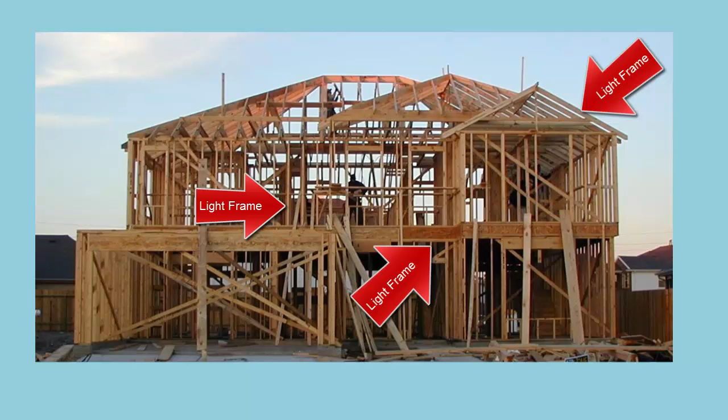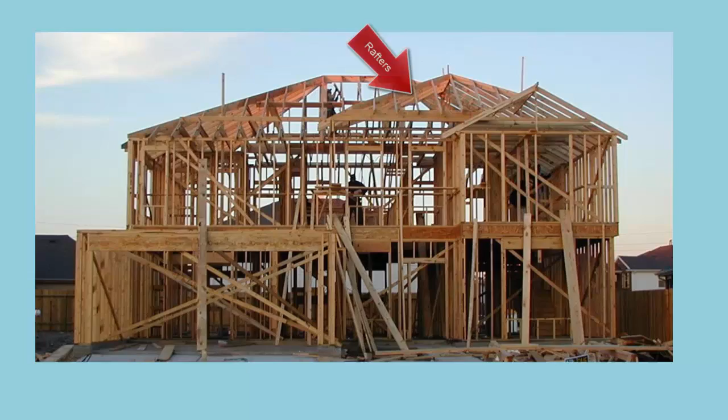Today, we'll look at light frame construction, which is typical for building houses in the United States, and the loads it must withstand. Light frame construction consists of repetitive members, like wood rafters or trusses for the roof structure, wood studs for walls, and wood joists for floors.

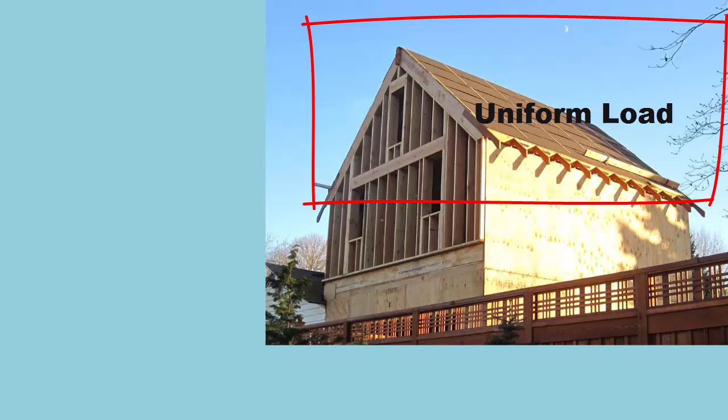We use a shorthand to describe the combined loads as a certain weight per square foot, called a uniform load. The calculation is load in pounds divided by 1 square foot equals uniform load in pounds per square foot.

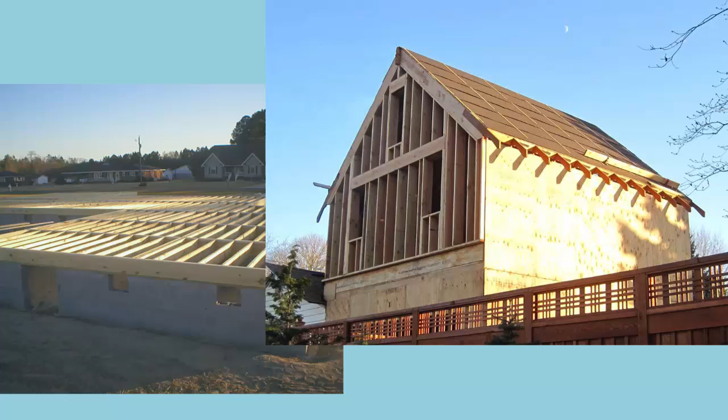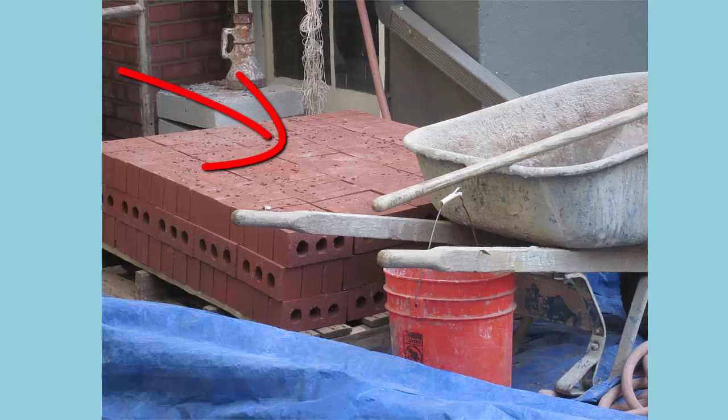Both roofs and floors carry live loads and dead loads. Live loads are temporary, like snow, furniture, and people. Dead loads are permanent, like the weight of building materials. Uniform loads are a combination of live loads and dead loads.

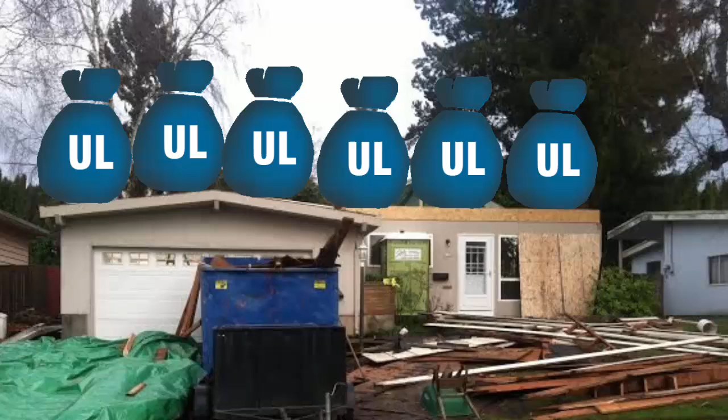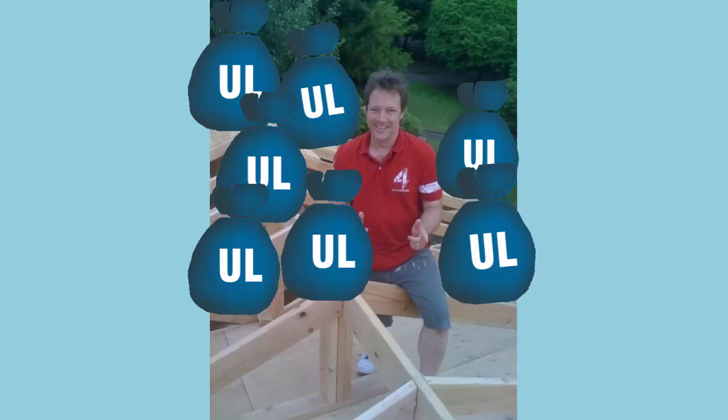Think of uniform load as a weight, like a sandbag sitting on each square foot of roof. It's called a uniform load because the repetitive members and the load they carry are evenly distributed across the roof. Loads start at the roof.

Structural repetitive members at the roof, rafters or trusses, transfer vertical loads to beams or walls. Additional loads occur at the floors, and the repetitive structural members, floor joists, transfer the loads to beams, walls, or columns. All of these loads are eventually transferred to the foundation system.

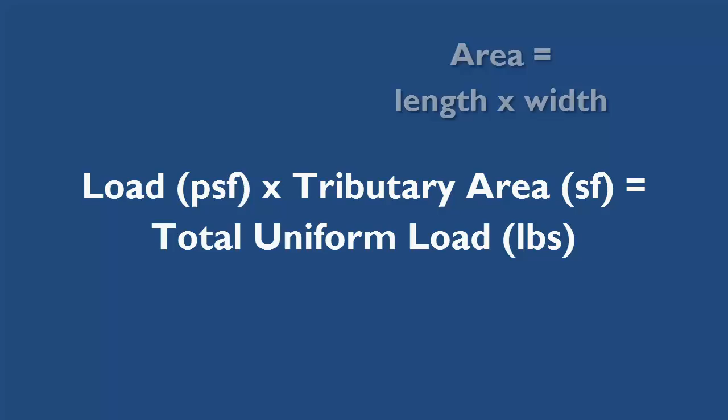Tributary area. The equation we use to calculate total loads for horizontal surfaces, like roofs and floors, is the uniform load in pounds per square foot times the tributary area in square feet, which equals total uniform load in pounds. For the area, we need both a width and a length.

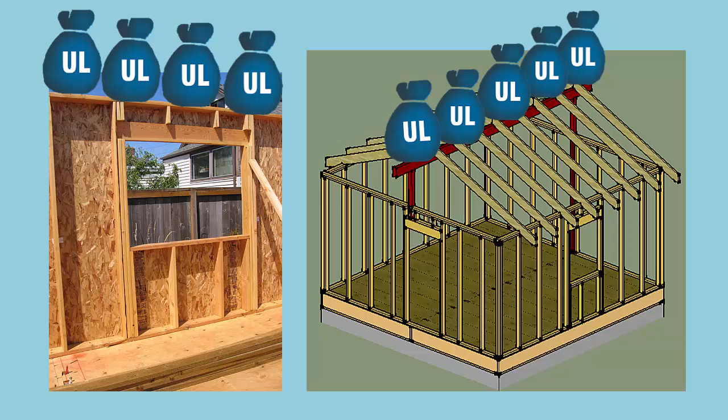However, these uniform loads can also be expressed as pounds per linear foot, which is how we measure loads on walls and beams. To get this number, we need to identify the tributary width. When we multiply units in pounds per square feet by units in feet, we simplify by deleting the feet from the equation, and the resulting units are in pounds per foot.

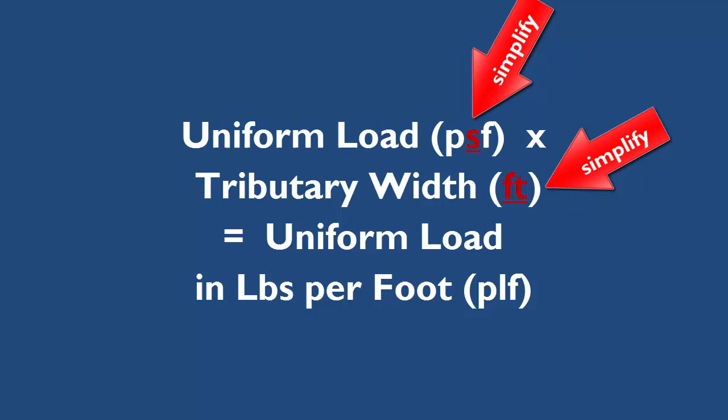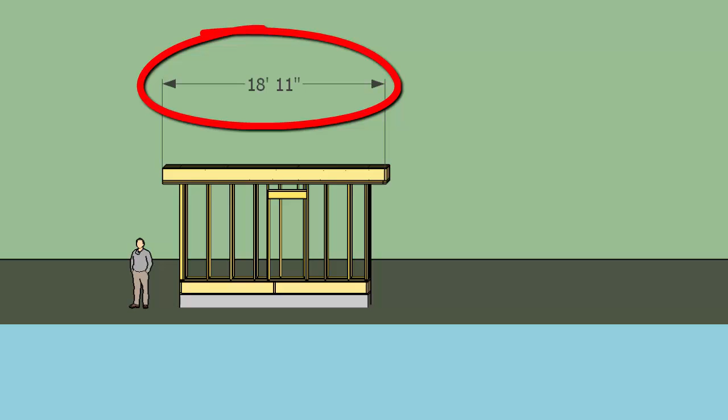Measuring tributary width. Tributary width is the horizontal measure between support points. This means that the width measured is the same whether it's flat like a floor or sloped like a roof, and the slope can be a little or a lot. The tributary width remains the same.

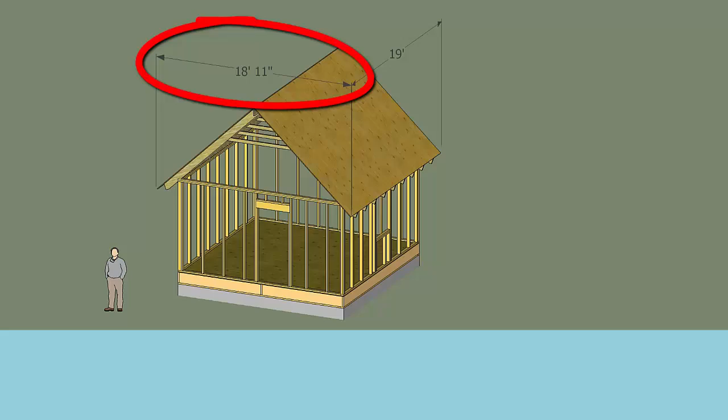To determine tributary width for roofs, we first need to consider the type of roof structure and how it transfers its loads. The three types of roof structure are trusses, rafters with ridge board, rafters with ridge beam.

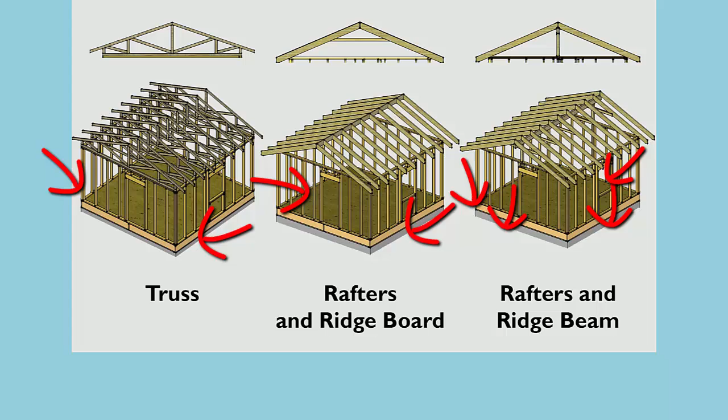Both trusses and rafters with ridge board transfer roof loads in the same way, so we'll look at them together. It's important to remember that the ridge board is non-structural and merely provides lateral stabilization to the rafters at their peak. To calculate tributary width for trusses and rafters, which transfer loads to exterior walls, we measure horizontally from the ridge to the edge of the roof.

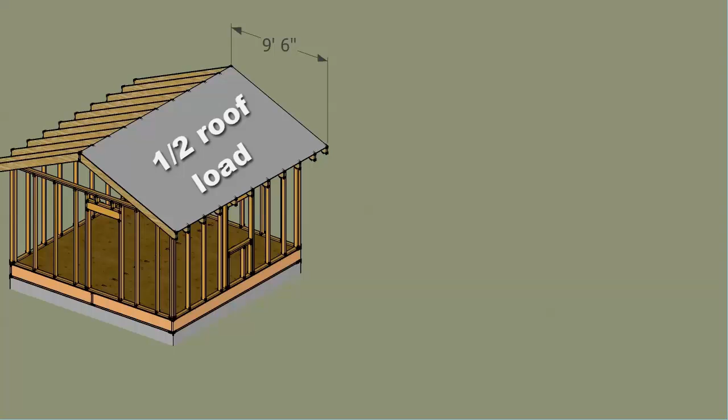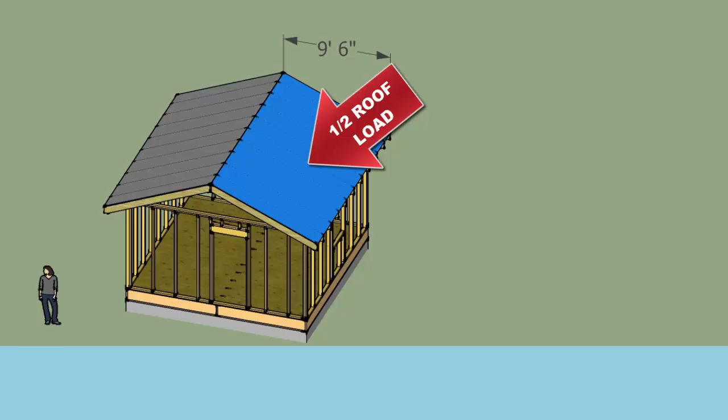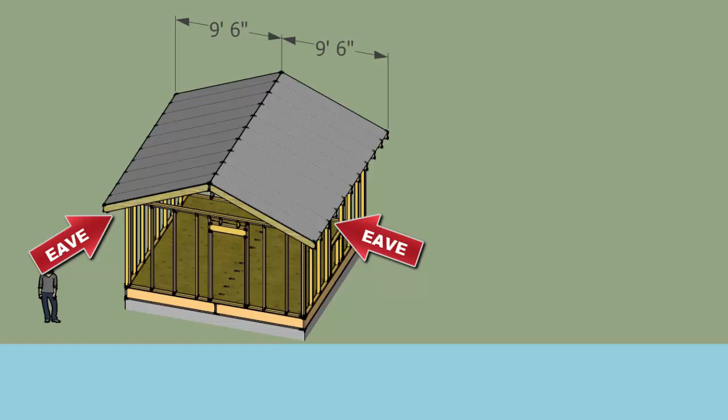Note that we measure half of the roof width, because half the roof transfers its load to one support wall and the other half transfers its load to the other support wall. We include eaves in this calculation. Later, we'll look at eaves separately.

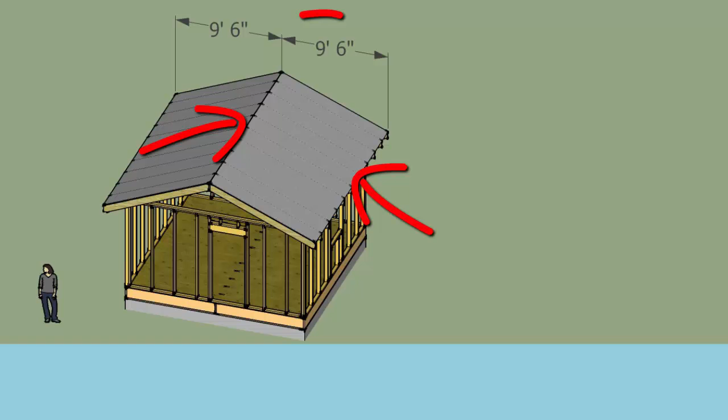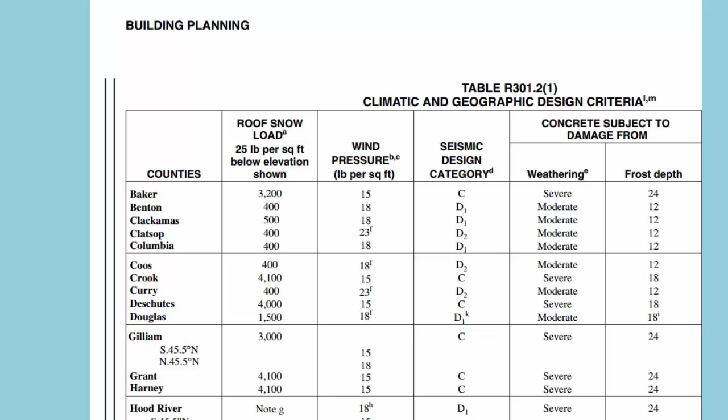This example has a roof that's 19 feet wide. Half the roof, from ridge to eave, is 9'6" linear feet. The uniform load can be looked up in the building code. If this house is in Oregon, the live load, snow load, would be 25 pounds per square foot. The dead load is 15 pounds per square foot.

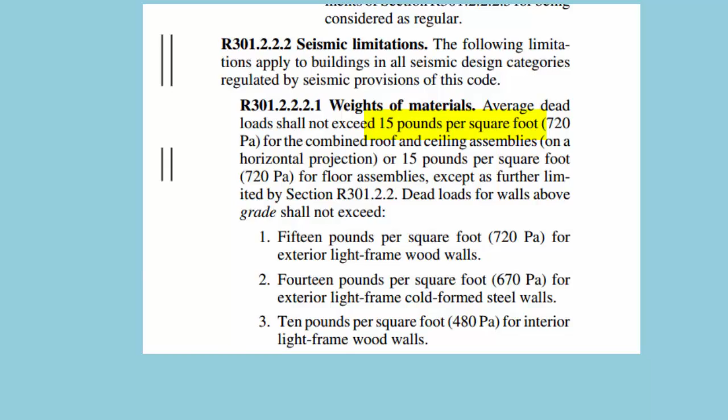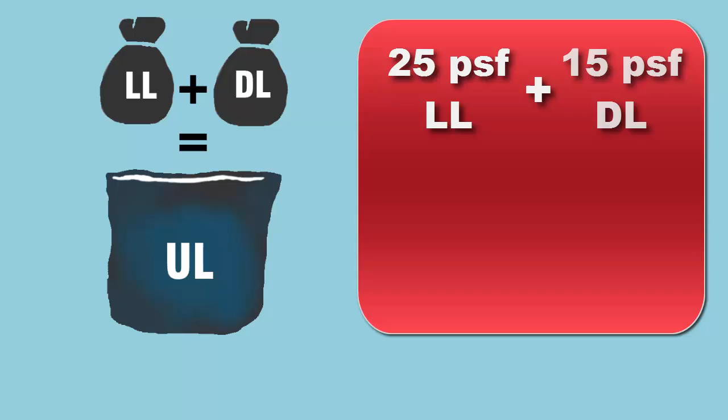Remember, live plus dead equals uniform load. For this example, in Oregon, 25 pounds per square foot plus 15 pounds per square foot equals 40 pounds per square foot uniform load. Our uniform load per linear foot will be our uniform load times our tributary width.

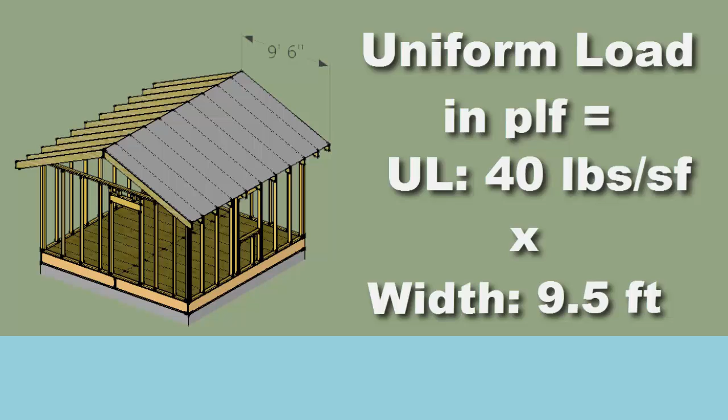Our load is 40 pounds per square foot, and our width is 9 foot 6, which equals 380 pounds per linear foot on each supporting wall. Tributary width for rafters with ridge beam.

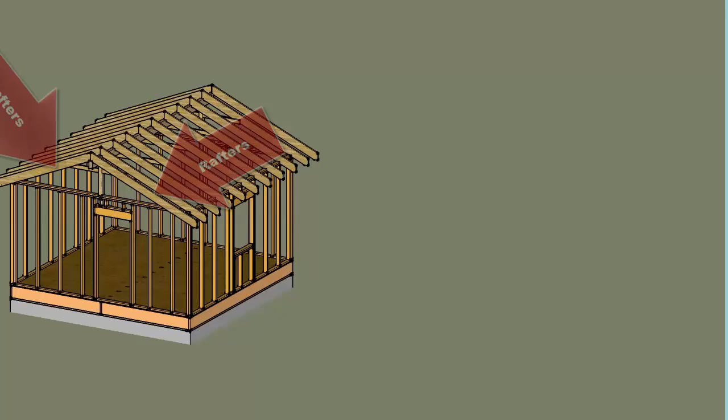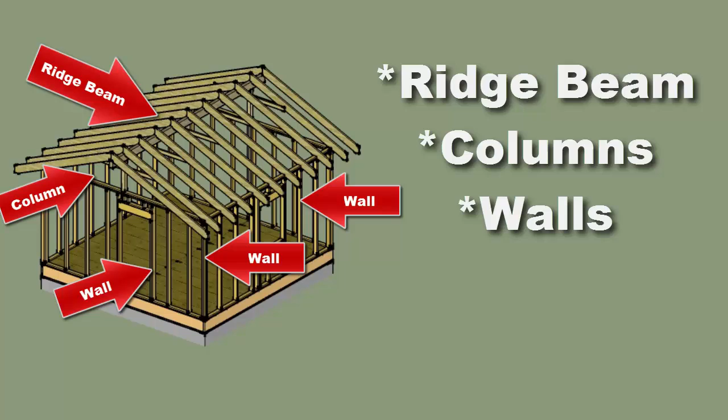Here's an example of the same house with rafters and a load-bearing ridge beam. Each rafter transfers half of its uniform load to the structurally significant ridge beam, which sits on columns or end walls, and the other half to an exterior wall. Our loads are supported by more elements in this type of structure.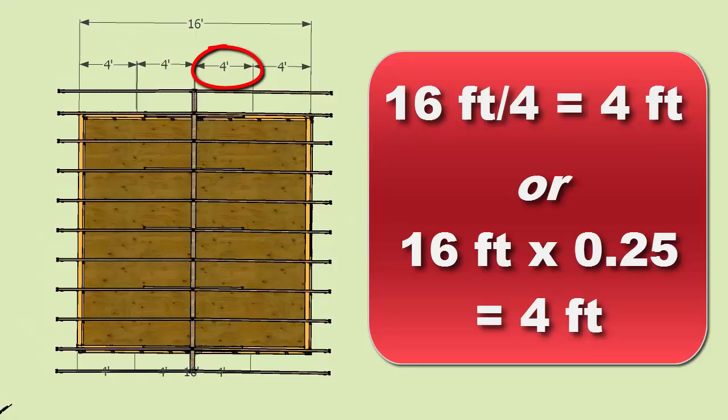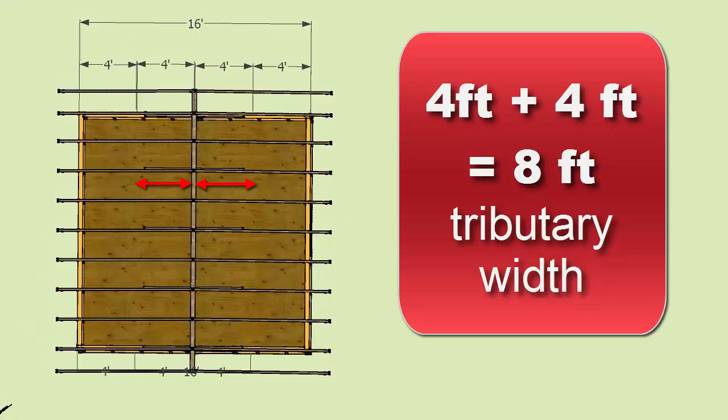First, let's establish tributary width for the load on the beam. Measure horizontally from the beam to halfway to the exterior wall. Note that it's a quarter of the width from outside wall to outside wall. In this case, a quarter of the length equals 4 feet. Measure again on the opposite side of the ridge beam to a point halfway to the exterior wall, and add the two numbers to get the tributary width.

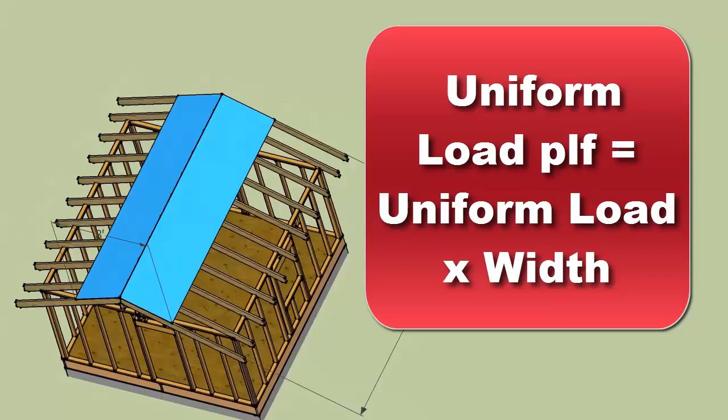Our uniform load per linear foot will be our uniform load times our tributary width. Our load is 40 pounds per square foot, and our width is 8 feet, which equals 320 pounds per linear foot on the beam. Now let's establish tributary width for the load on the walls.

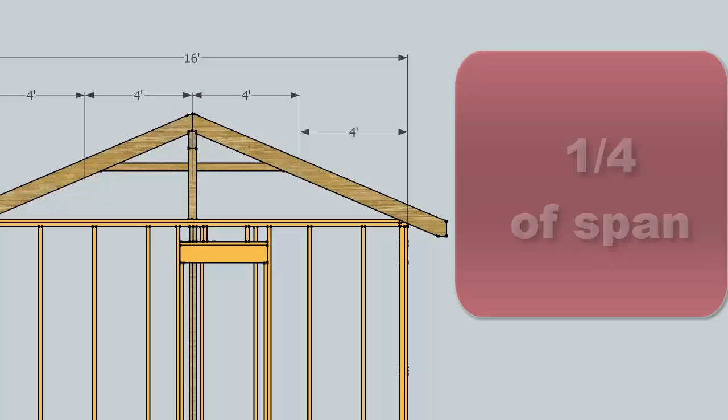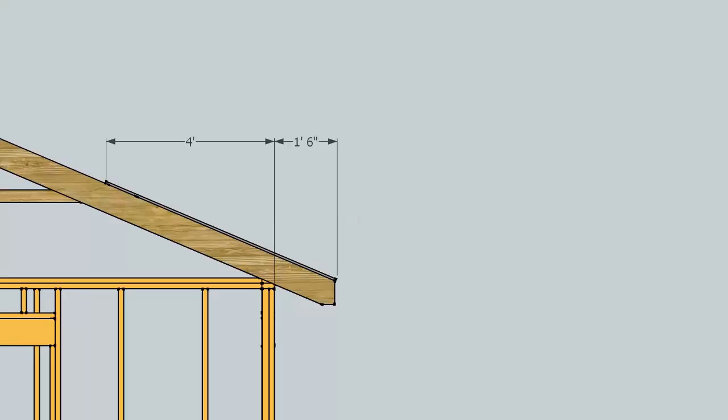Measure horizontally from halfway between the ridge and the wall to the exterior wall. We noticed before that it's a quarter of the width from outside wall to outside wall, and in this case, a quarter of the length equals 4 feet. But what about the eave overhang, the portion of the rafter outside the wall? We need to include it because it rests on the wall as well. So measure horizontally again from the outside wall to the edge of the rafter.

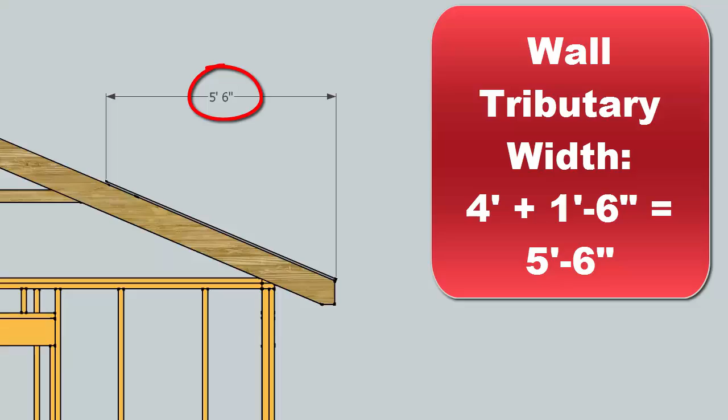Our overhang is 1 foot 6. Add the two numbers together to get the tributary width. 4 feet plus 1 foot 6 is 5 foot 6. Our uniform load per linear foot on the wall will be our uniform load times our tributary width. Our load is the same as before, 40 pounds per square foot, and our width is now 5 foot 6. 40 pounds per square foot times 5 foot 6 is 220 pounds per linear foot on each supporting wall.

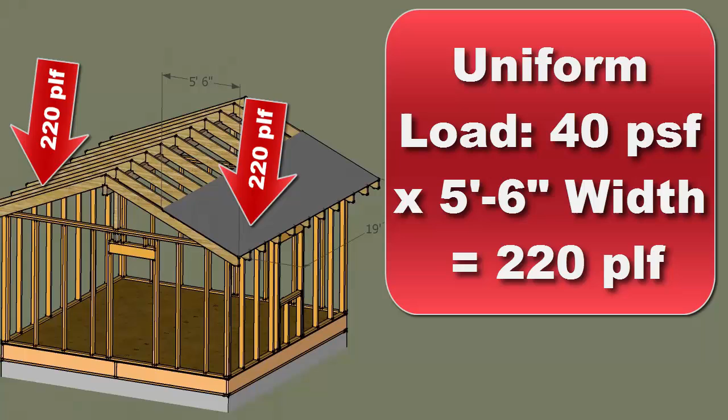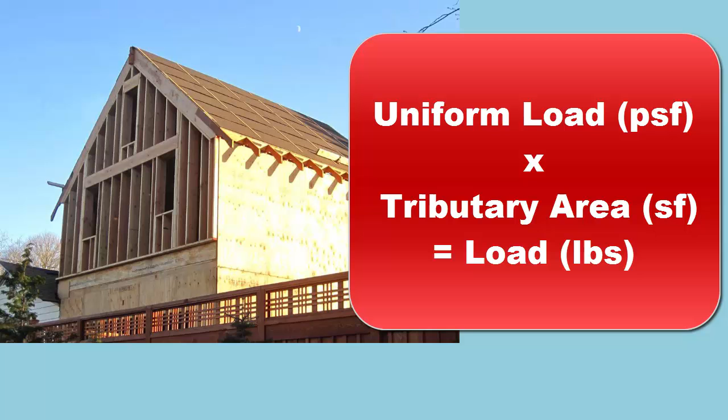Let's revisit tributary area before we end our discussion on roofs. Remember, the equation we use to calculate total loads for horizontal surfaces, like roofs and floors, is the uniform load in pounds per square foot times the tributary area in square feet, which equals total uniform load in pounds. For the area, we need both a tributary width and a tributary length.

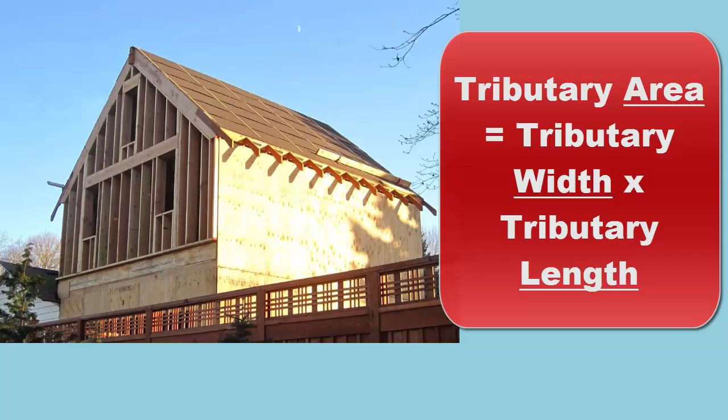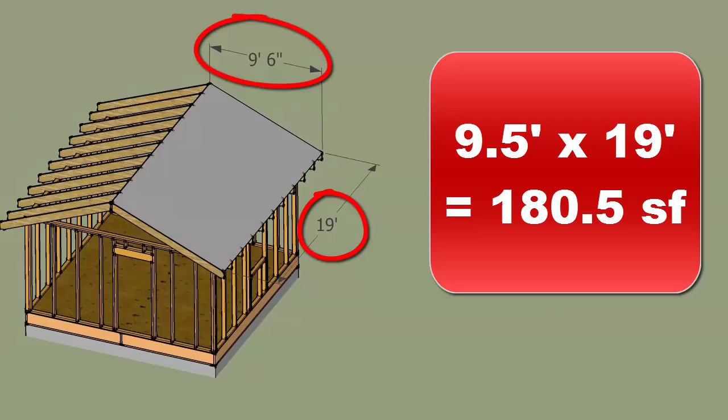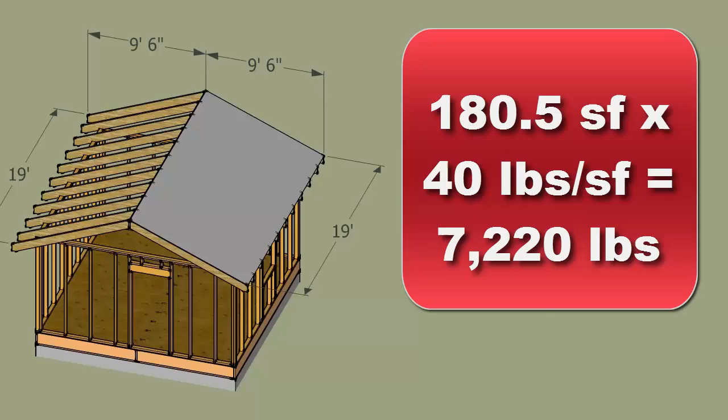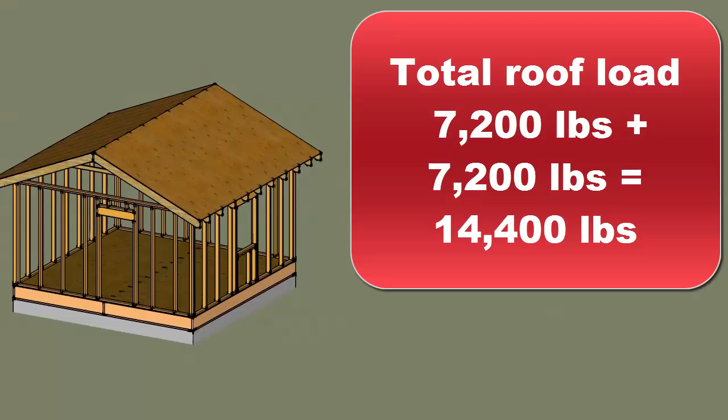The example with trusses, or rafters with a ridge board, has 2 tributary widths, therefore 2 tributary areas. Each area is 9 foot 6, tributary width, multiplied by the 19 foot length, for a total of 180.5 square feet. Multiply the square feet by the uniform load for a total of 7,220 pounds. This is the load of half the roof that rests on one exterior wall. The total roof load on this small house is 14,440 pounds. This is true for both a truss roof system and for rafters with a ridge board.

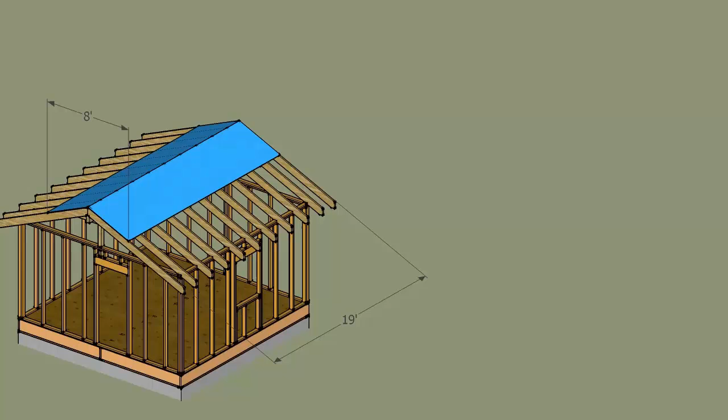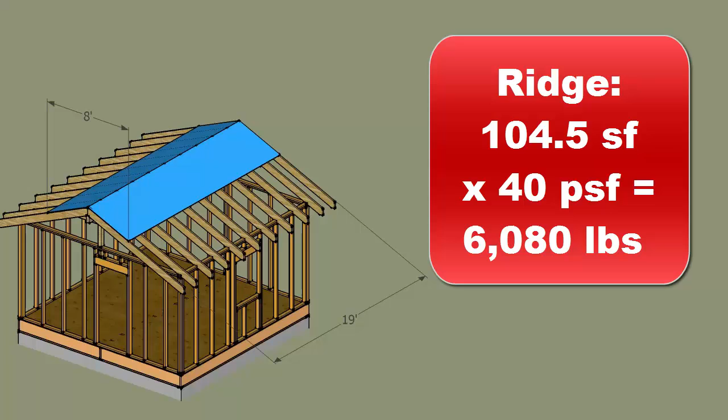For the example of the rafters with a ridge beam, there are 3 tributary widths and therefore 3 tributary areas. The ridge beam's tributary width is 1/2 of the total span, or 8 feet. The length of the roof is 19 feet. The tributary area is 104.5 square feet. The ridge load is 6,080 pounds. One wall supports 4,180 pounds, and so does the other.

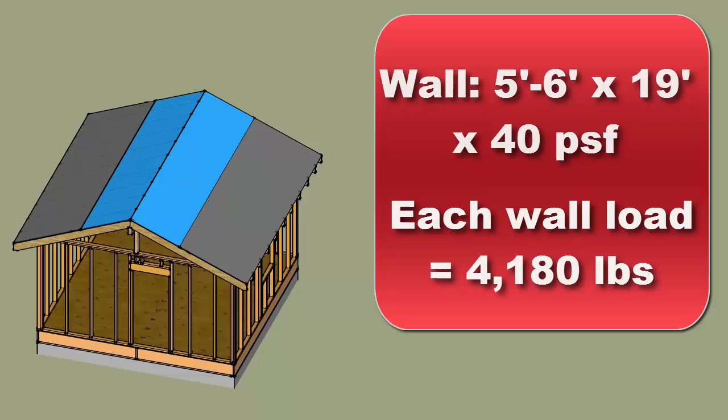The combined load on this small house is, once again, 14,440 pounds. We hope you learned something today, and thanks for watching.